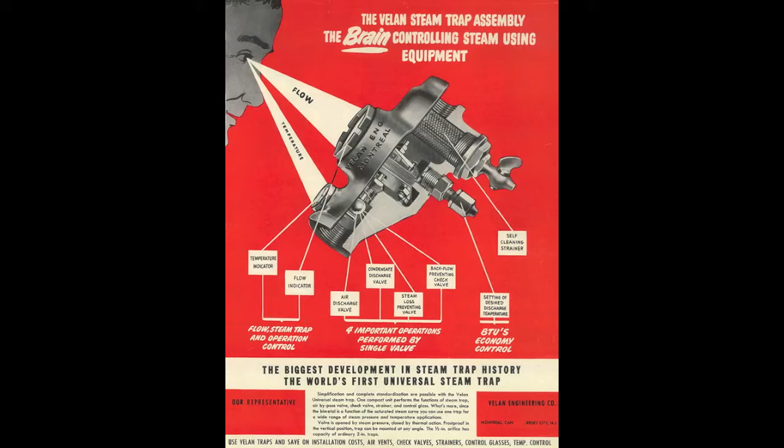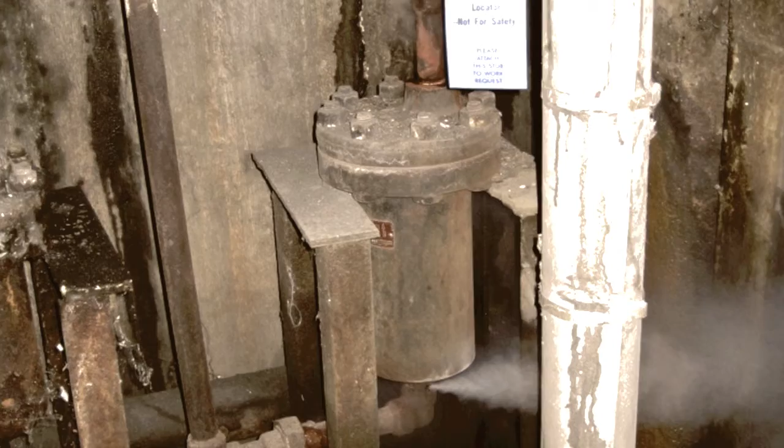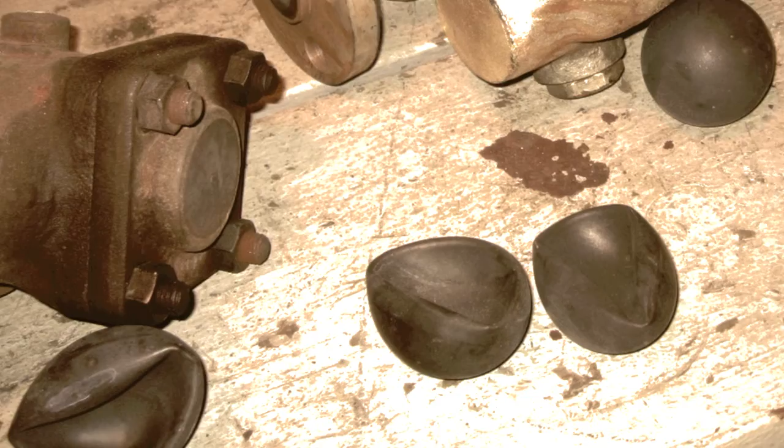The extreme conditions in the winter of 1957 highlighted a major problem inherent in the technology of the time. Steam traps, which many considered to be minor, inexpensive components of process and heating systems, were capable of causing serious damage to large, expensive heating coils, heat exchangers, and process equipment.

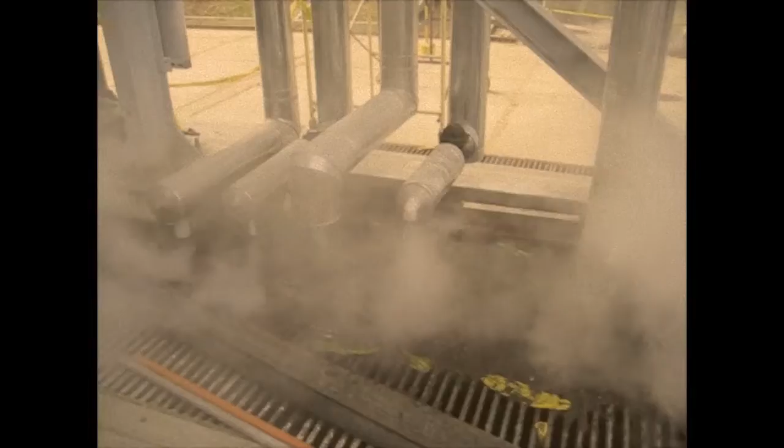Mr. Velan recognized that mechanical steam traps, in order to avoid damaging the equipment they served, must only fail in the open position, guaranteeing drainage and preventing freezing inside of the coil.

Since 1932, conventional float and thermostatic steam traps have been widely used on process and heating equipment throughout North America. Consisting of a float mechanism to control the discharge of condensate and a thermostatic bellows to control the discharge of air and non-condensable gases, the conventional F&T trap brought several disadvantages.

First of all, if the float ruptured, the trap was rendered inoperable and the equipment could become waterlogged or freeze. Float rupture is typically due to water hammer or corrosion.

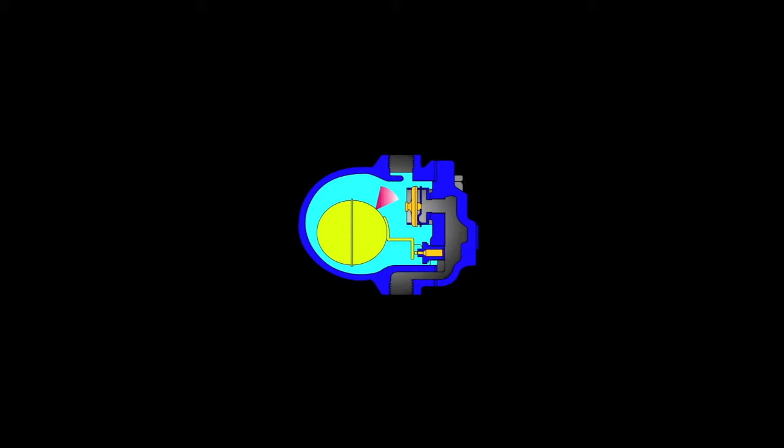Secondly, if the thermostatic bellows ruptured, the steam trap would not vent air from the system during startup and the equipment would be unable to drain. The bellows typically fail due to water hammer, superheat, or simply metal fatigue.

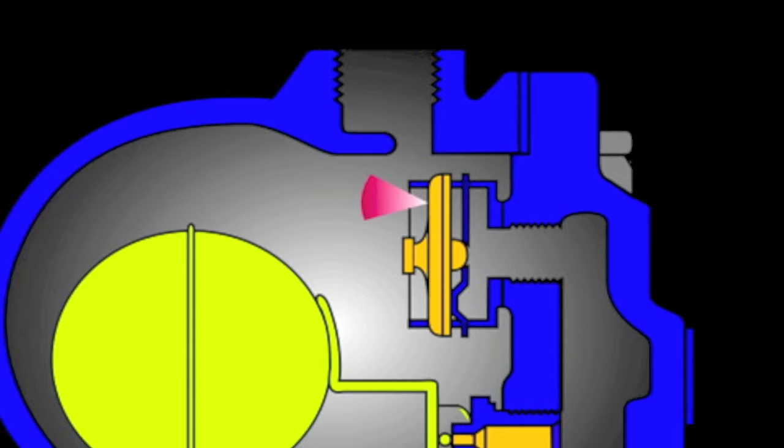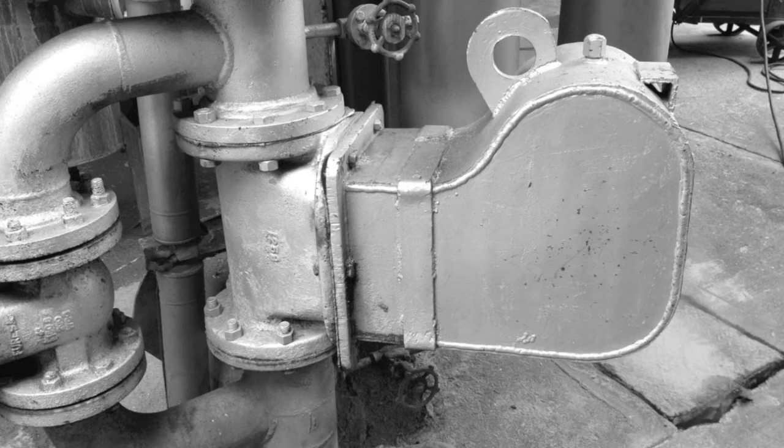Also, the location of the float mechanism at an elevation above the bottom of the trap meant that there was always water present in the trap body. This could lead to freezing during shutdown periods, as well as excess corrosion during the summer months when heating equipment was normally turned off. While the float traps of Mr. Velan's day were widely used, they presented constant problems for operations and maintenance in industrial plants throughout the world.

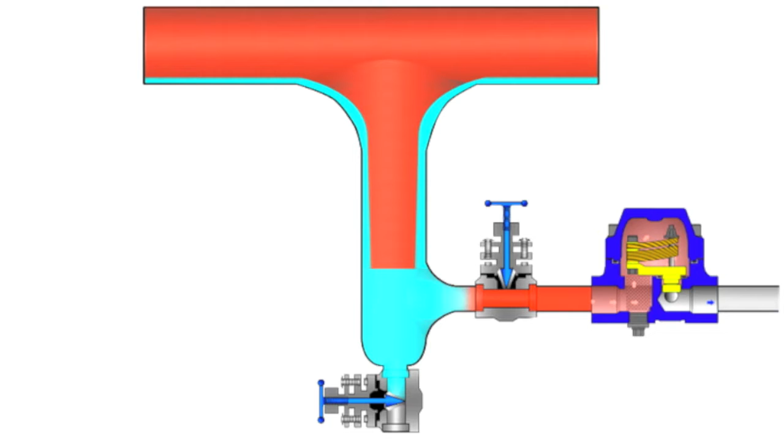Since 1950, Velan had been manufacturing bimetallic steam traps for drip leg and steam tracing applications. These traps already possessed the characteristic of failing only in the open position. However, the challenge was to modify this design for use on large process and forced heat applications.

In hindsight, the solution was simple. Velan thermostatic steam traps were based upon the principle of a free-floating and rotating ball valve placed on the downstream side of a stellite valve seat and being actuated by a multi-segment bimetallic element.

The result was a steam trap that combined high energy efficiency with long service life and a failure mode always in the open position. Mr. Velan recognized that the addition of a float to the original bimetallic design would make them suitable for operation in conditions where condensate load and steam pressure fluctuate rapidly.

This combination float and bimetallic trap represents a marriage of the best of both designs. The bimetallic element controls the closing of the steam trap thermostatically, ensuring that the trap remains open when subjected to temperatures below that of steam. However, the float opens the steam trap mechanically, ensuring that all condensate is discharged immediately when it reaches the trap.

At startup, the bimetal element is relaxed and the valve is open wide, allowing for rapid discharge of cold condensate and non-condensable gases.

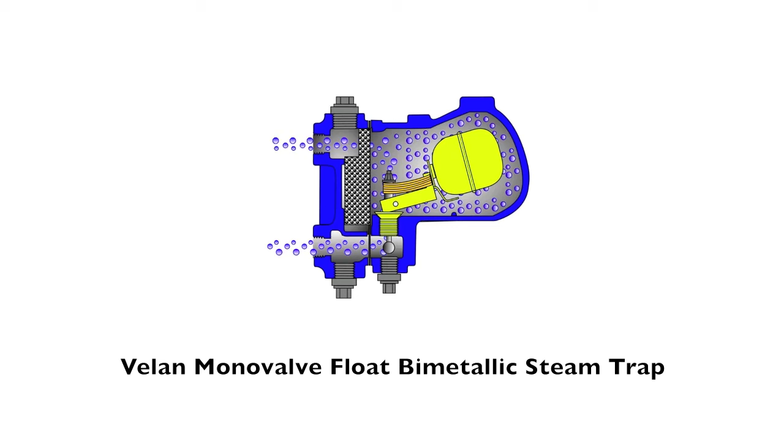As the temperature of the condensate increases, the bimetal element pulls the valve closed. In the presence of live steam, the valve remains closed tightly. As the temperature of the condensate cools slightly, the bimetal elements relax and the valve is opened. When large amounts of condensate reach the trap, the float opens the valve fully, ensuring complete drainage of the equipment.

In the event of a sudden drop in upstream pressure, the valve and seat arrangement act as a check valve, preventing reverse flow in the system.

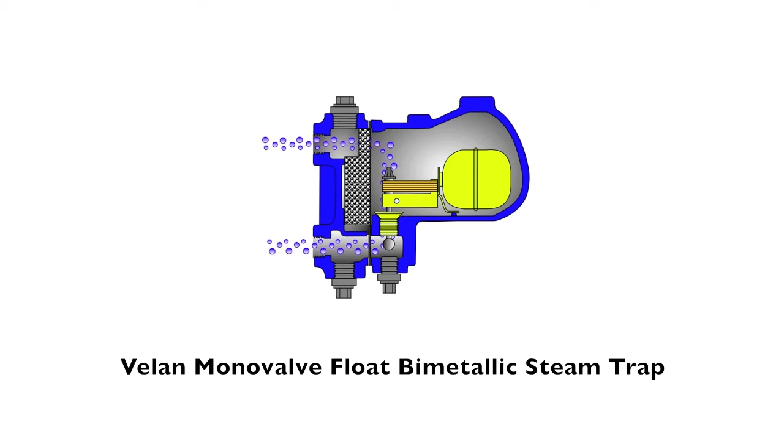The Velan float and bimetallic steam trap remains unique in the market today. By requiring heat from steam to close the trap, the Velan MFT cannot fail in the closed position, protecting process coils and heat exchangers from damage due to freezing and waterlogging.

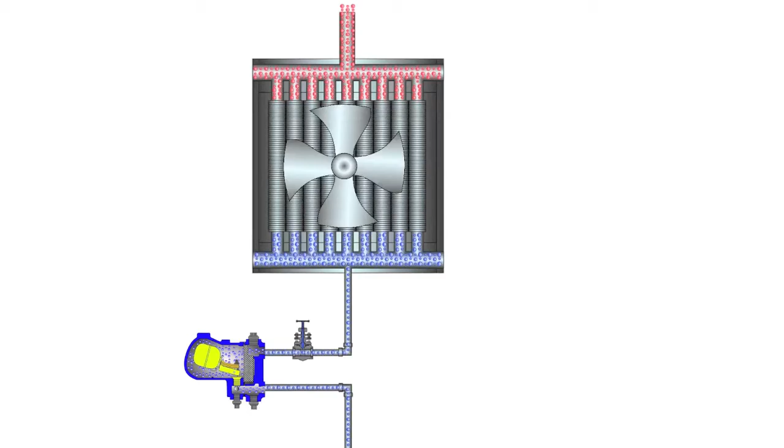The design of the ball valve on the outlet side of the orifice provides complete resistance from damage due to water hammer and overpressure. The inherent durability of bimetallic air venting makes the Velan MFT superior to conventional float thermostatic steam traps that use liquid-filled bellows. Protect your investment in your process equipment with the use of Velan float bimetallic steam traps.

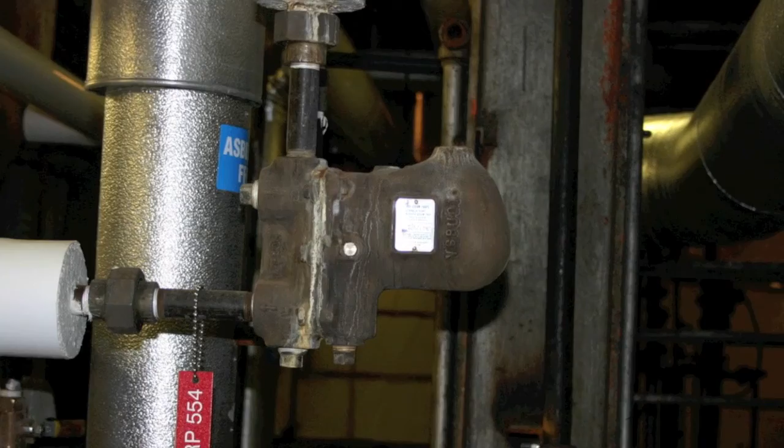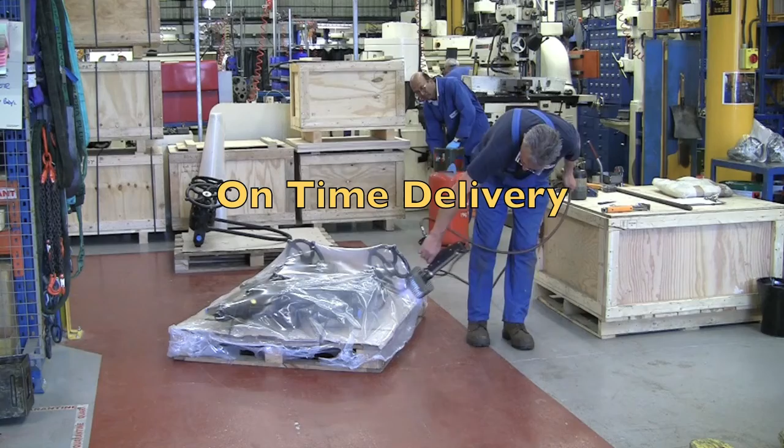Velan steam traps are manufactured in compliance with all major international quality standards using the most durable materials available today. A dedication to continuous product improvement and on-time delivery make Velan a worldwide leader in the design and manufacture of steam traps.

For over 60 years, Velan has been the steam trap of choice when durability, rugged construction, energy efficiency, and critical drainage requirements are needed.